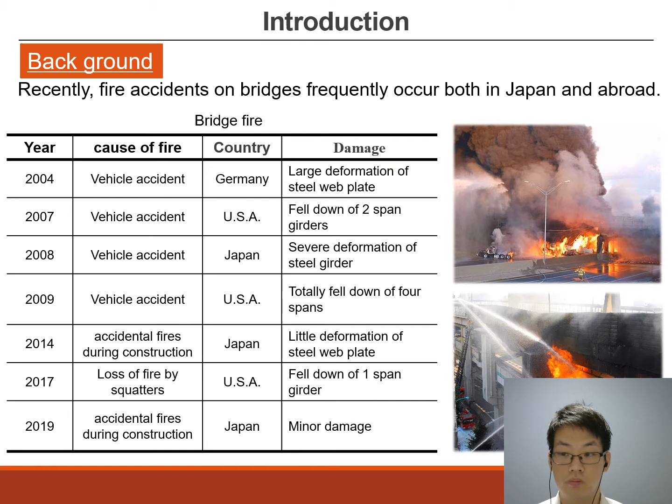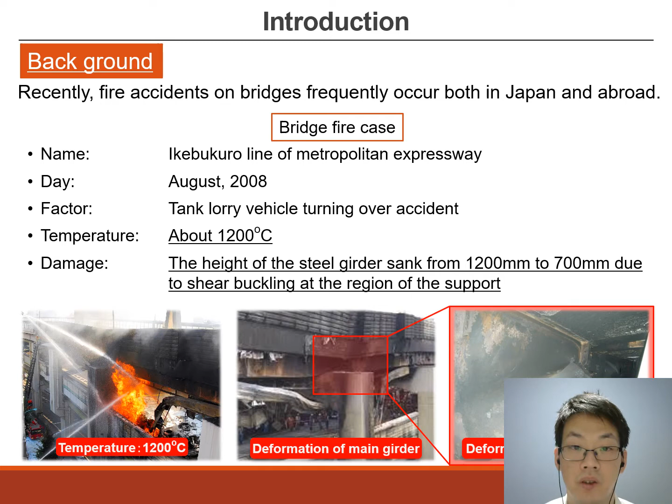The point is, bridge fires have a great impact on society. When a bridge fire occurs, in the worst case, the bridge falls down, and it greatly affects society.

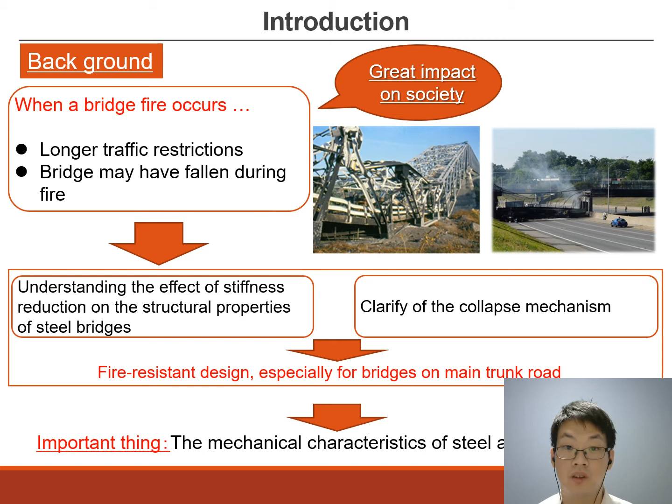In order to avoid such situations, it is necessary to grasp the effect of the strength lowering of steel in fire on the structural characteristics of steel bridges, and to clarify the collapse mechanism. It is necessary to carry out fire resistance design for many bridges on main trunk roads. Therefore, it is necessary to grasp the mechanical properties of steel at high temperature.

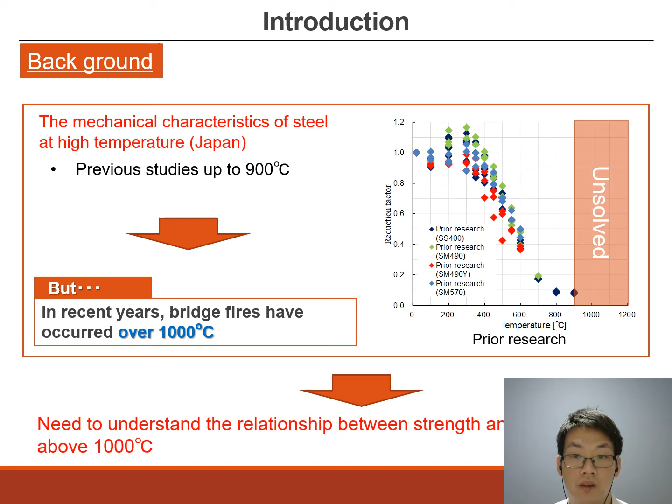In addition, the design methods for bridges in Japan have changed in recent years, but they don't consider the design method for the safety of bridges after fire. Therefore, reliability indices, load factors, and resistance coefficients have been studied with the aim of clarifying the resistance coefficients under fire conditions. However, in these studies, the partial coefficients for fire have not been considered.

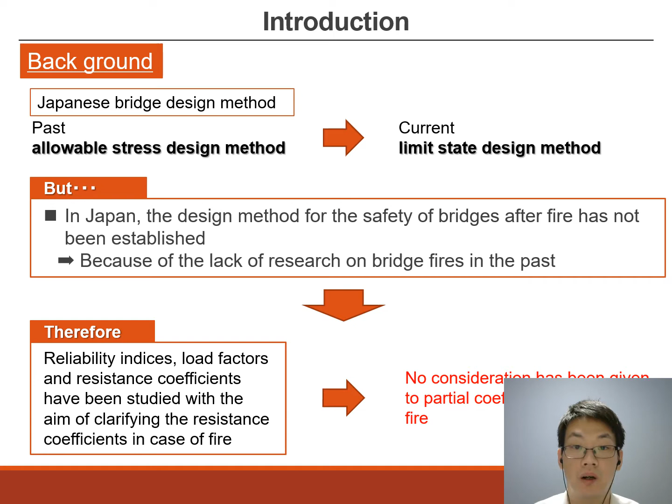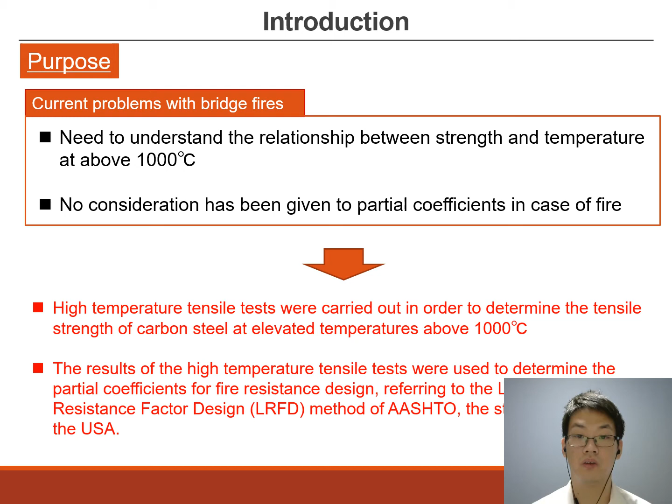The current problems of bridge fire are as shown in the previous slide. In order to solve these problems, high temperature tensile tests were carried out to clarify the mechanical properties of carbon steel at temperatures above 1,000 degrees. Based on the result, the partial coefficients were obtained by referring to the load and resistance factor design method of AASHTO.

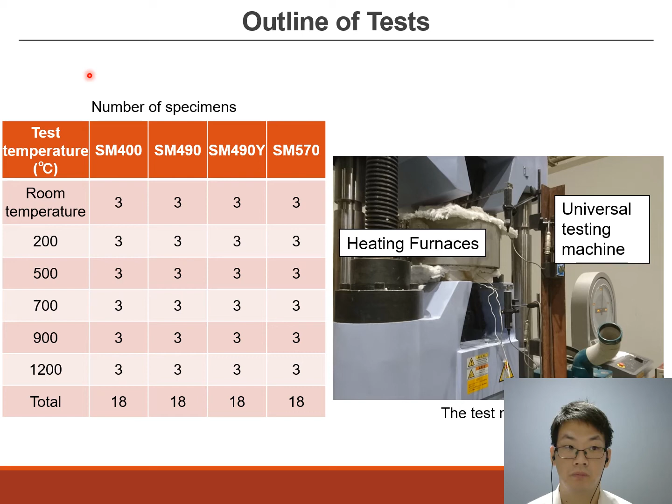From this slide, we will discuss high temperature tensile testing. The tests were carried out using universal testing machines as shown in this photo on the right. The test specimens were mainly of steel girders applied for bridges. The dimensions of the test piece are shown in this figure.

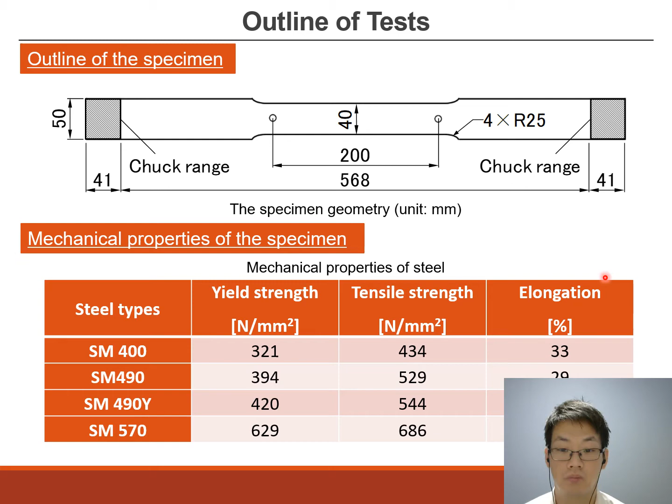The mechanical properties of each steel girder are shown in this table. The test conditions were summarized in these tables. The heating control position was set at the center of the specimens. In addition, the heating speed was 20 degrees per minute, and the soaking time was 30 minutes. Furthermore, the tensile speed was determined in accordance with JIS G 0567.

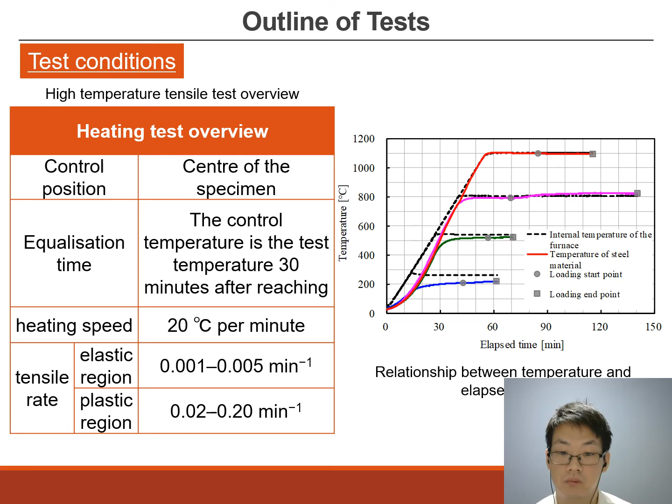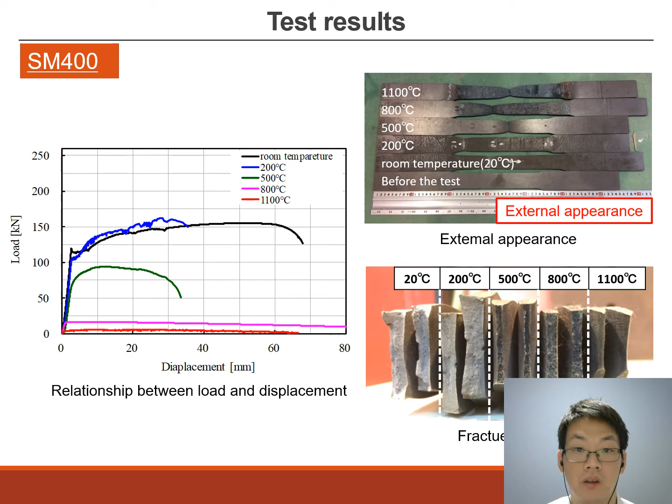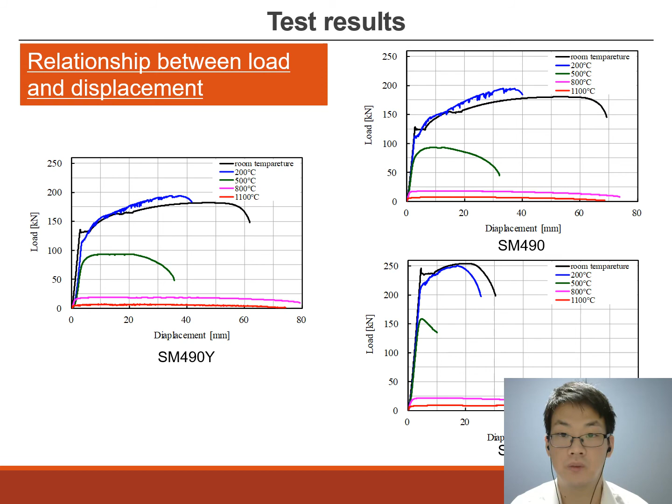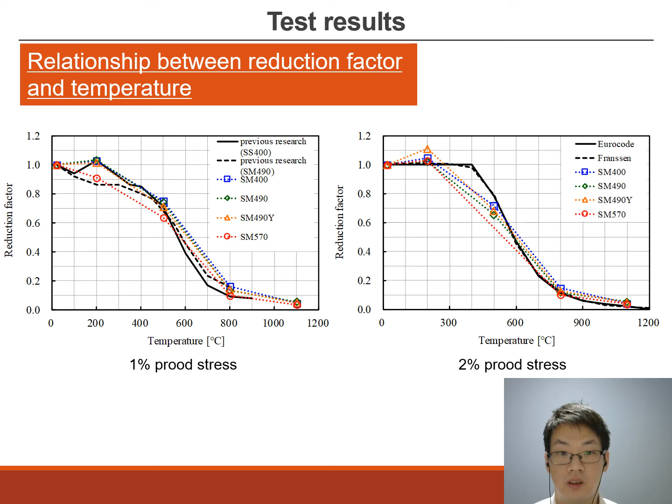Next, we will discuss the 1% and 2% proof stress. The result shows that for all types of carbon steel, the downward trend is almost identical to the result of existing studies.

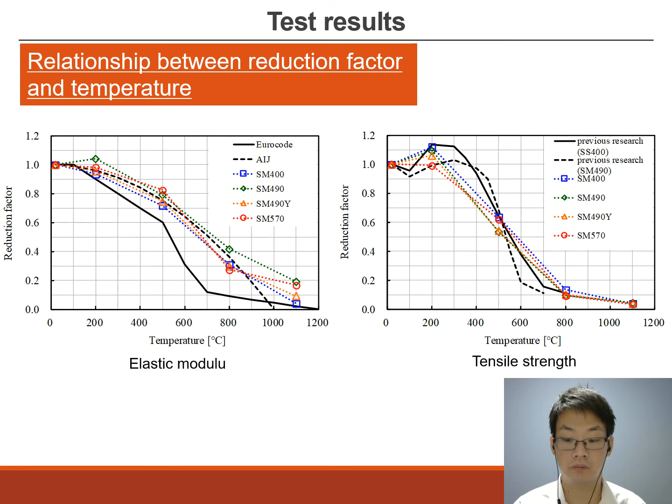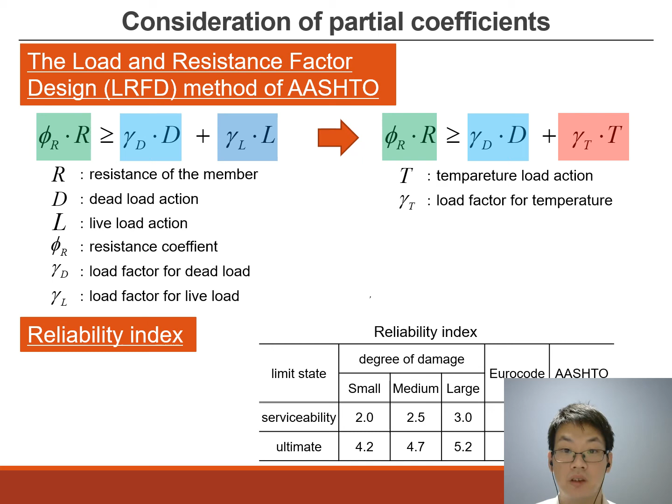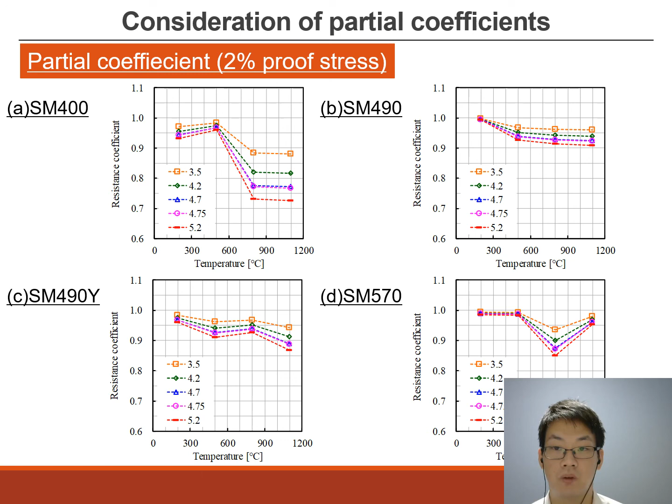Next, the result of calculations of the resistance factor at 2% proof stress are shown. As can be seen, the result shows the same trend as for the 1% proof stress.

I'm about to wrap up my presentation. We carried out experiments to clarify the mechanical properties of carbon steel at high temperature. From that result, the coefficient of resistance was discussed.

The conclusions obtained from these studies are summarized as this. First, it was found that the strength of carbon steel decreased with increasing temperature at all times. Next, the values of the resistance coefficients at 800 degrees and 1100 degrees resulted in a lower assessment of the resistance of the component than those at 200 degrees and 500 degrees.